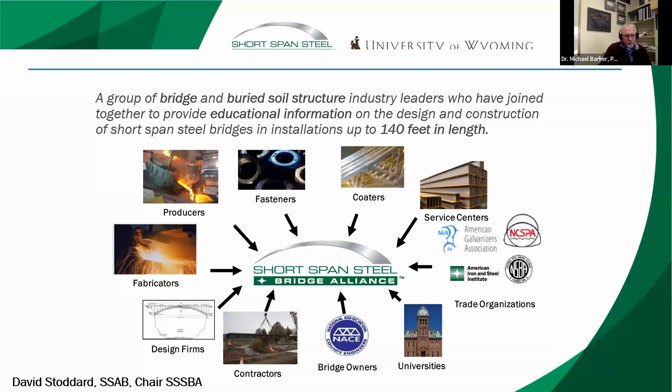So, of course, this is the Minnesota Local Technical Assistance Program January 15th webinar from the Short Span Steel Bridge Alliance. So who are the Short Span Steel Bridge Alliance? We're a group of bridge and buried soil structure industry leaders who have joined together to provide educational information on the design and construction of short span steel bridges.

Our chairman is David Stoddard, one of our steel manufacturers, SSAB.

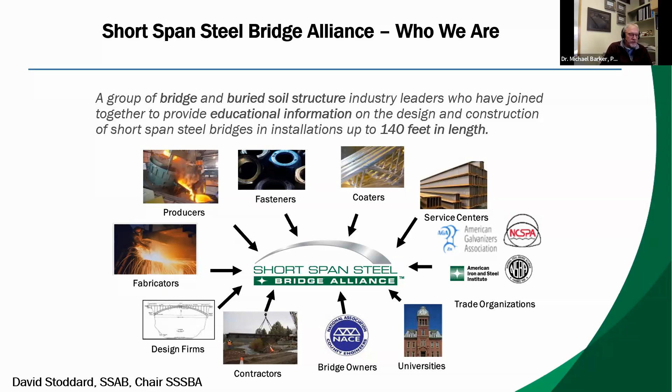Why we are: we started in 2007 with a couple major objectives. One was to remove design obstacles for short span steel bridges, and we're going to talk about those today. Overcome the preconception that concrete is always less expensive in the short span - we're going to talk about that today. And prefabricated steel bridge systems and accelerated bridge construction - we're going to look at some case studies.

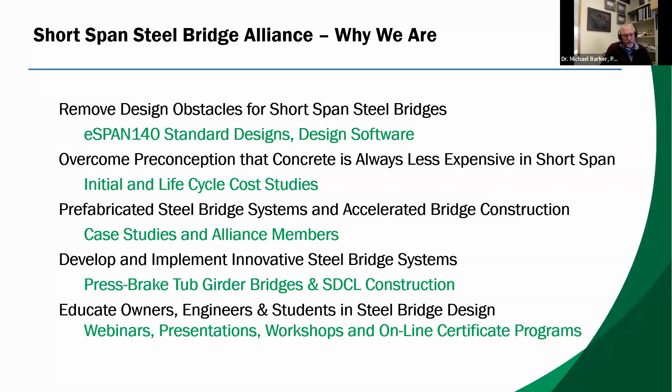And then our innovative steel bridge systems that have been developed through the SSSBA or other mechanisms, and we will talk about that today. And of course, today is an example of it, but we are out there to educate owners and engineers and students in steel bridge design.

So as the director of education, I kind of categorize my education programming as the 5 C's: cost, convenience, construction, county built, and carbon. Now, the ones that are circled here in red, we're going to talk about with some examples and that kind of thing.

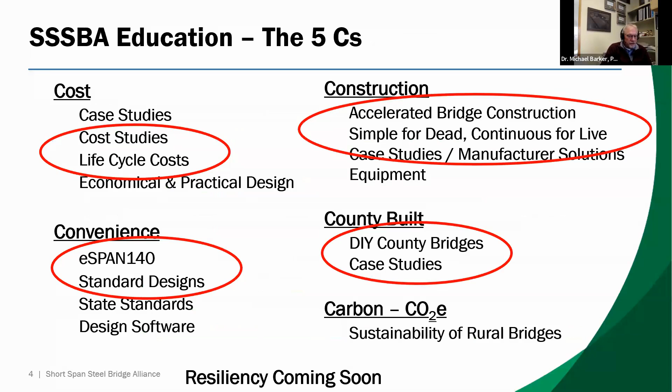And coming soon is resiliency, but I don't have that in the 5 Cs because I can't figure out yet how to do an R with 5 Cs. But that's coming soon.

So what we're going to talk about today is initial costs of steel and concrete bridges, dealing with that preconception, life cycle costs, because responsible owners should consider life cycle costs and long-term performance. That, a design tool, eSpan140, which will give you a steel bridge design in a matter of just a couple minutes. And then, of course, Bridge Manufacturer Solutions, where our Alliance members will build you a bridge, design a bridge, and deliver it to you.

Then we've done quite a bit of work with local crews building county bridges, and so we're going to talk about that a little bit. And then an innovative system, simple for dead, continuous for live, steel bridge construction, which is an innovative design thing. Then we're going to end up talking about how you can find out more information, or what our resources are, or additional training. And we only have time to quickly address all these topics today.

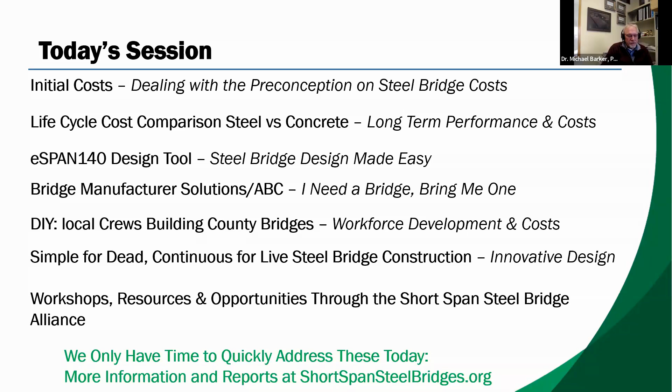So let's start. Initial cost, steel versus concrete. So when we started this back in the late 2000s, there was across the country a preconception that concrete is less expensive than steel bridges for typical bridges, simple span bridges. To the point where in many states or many counties, many times steel was not even considered. They just went directly to a concrete bridge.

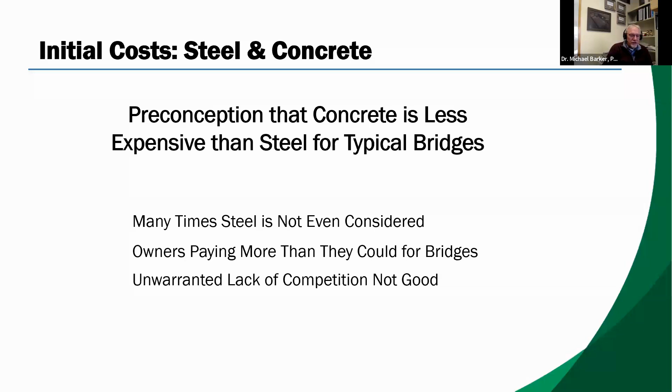And what we found, and what the National Steel Bridge Alliance found, is that the owners are paying more for those concrete bridges when there's no competition than if there is competition. And that unwarranted lack of competition is not good for anybody, the public or the owner. And so the Alliance has done, I can't tell you how many studies on first costs, and I'm not going to go through them individually just because of time, but I will show you where we're going to be giving this presentation here in February, a little bit later in today's talk.

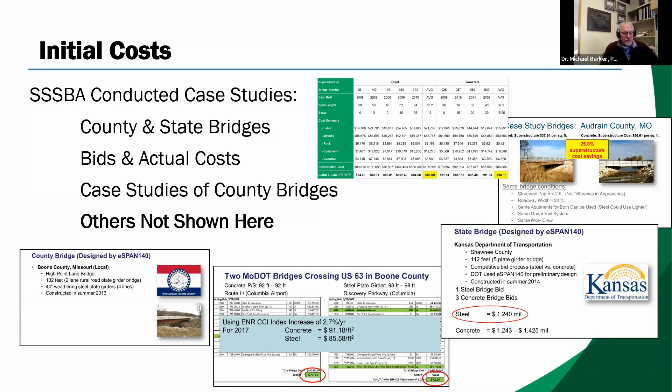But we've conducted case studies where we look at county bridges and state bridges, and we look at actual costs and bids and that type of thing. And so this is just a kind of a smattering picture of some of the case studies we've done to show that, yes, that preconception that concrete is always less expensive than steel bridges is a misconception, that steel and concrete bridges are competitive. So I'm not sitting here saying steel is going to beat concrete. What I'm saying is, hey, we should consider both steel and concrete so that we get the best product for the best price. And you can visit these studies or look at all these studies on that website, shortspansteelbridges.org.

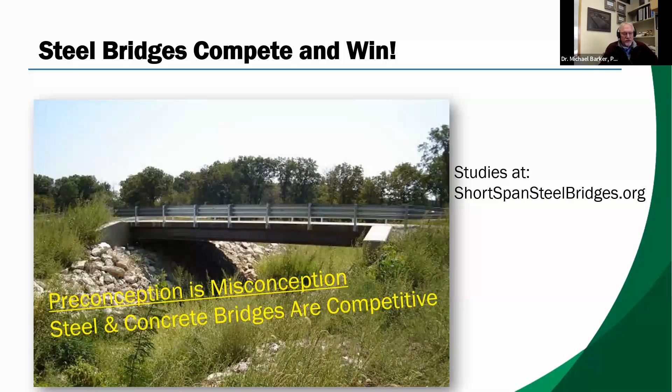But what about life cycle costs? Like I said earlier, responsible owners are starting to look at life cycle costs and life cycle performance of bridges. And as owners replace those bridges, the question of life cycle or life service and life cycle costs comes up. It's one of the most common questions I get when I go out and talk to counties and states. And the bridge industry, it says, does not have a good answer. And I crossed that out and said, did not have a good answer.

In fact, the concrete people always said, oh no, concrete bridges have better life cycle costs. And the steel bridge people always said, the steel bridges all have better life cycle costs. And they would give their information, and that anecdotal information was not very convincing.

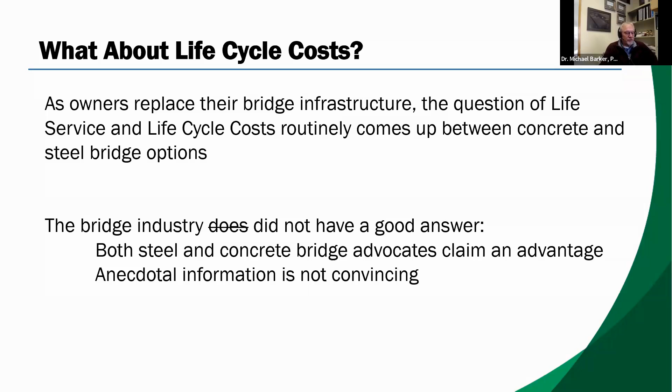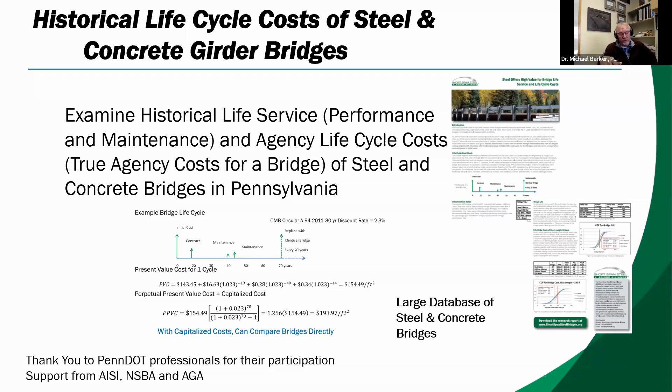And so the Alliance did a study, back in 2015 I believe, where we looked at the historical life service, or the performance and maintenance, and agency life costs, or life cycle costs, or the true agency costs for a bridge of steel and concrete bridges in Pennsylvania. And we looked at a very large database, like 1,700 bridges. And it looked at the historical life service because that's what actually happened. And the study, the initial year for the study was 1960, when precast concrete became very popular and quality steel detailing became popular. So it looked at more or less modern bridges.

And the conclusions from all this.

Now, this is a big study, and I'll show you where we're going to be presenting this in February. Typical concrete and steel bridges—the boxes, I-girders, rolled beams, and plate girder type bridges—are competitive on initial costs, which we already knew, future costs, life cycle costs, and even bridge life. The conclusion of this study is that owners should consider both steel and concrete bridge alternatives for individual bridge projects. When we looked at all of that data, all the types of bridges are similar, with none way out of balance, meaning none have high life cycle costs compared to the others, or low.

You can find this report on the shortspansteelbridges.org website. We also did a study on galvanizing, which is a long-term steel protection system. The industry was interested in what kind of effects galvanizing has on life cycle costs. You can find that report there also.

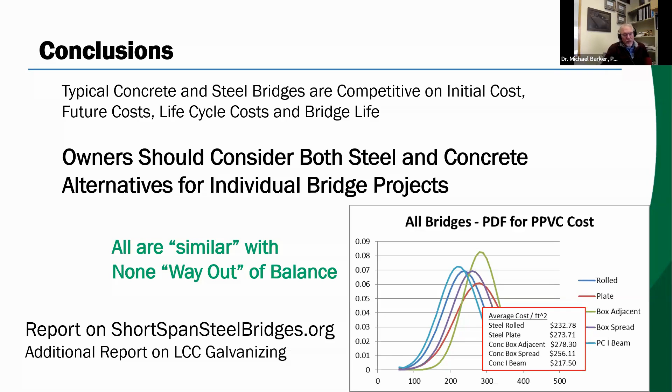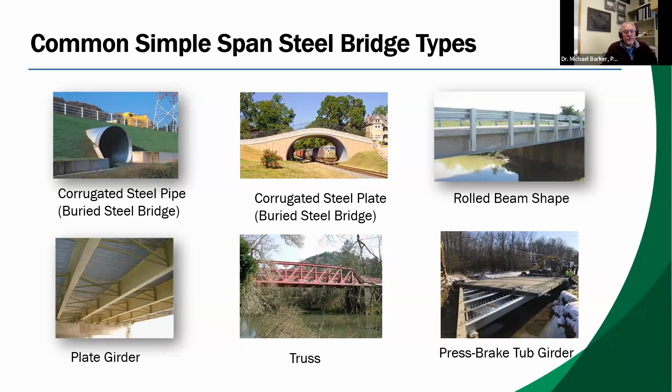Okay, so we've taken care of costs. The Alliance deals with these types of bridges: corrugated steel pipe, or what we call culverts, is a buried steel bridge, and that's certainly one our group associates with. Then you've got corrugated steel plate, which is kind of an arch bridge, with corrugated arches going across to create the bridge. And then, of course, the rolled beam-shaped bridges and the plate girder bridges. Our manufacturers certainly have their truss bridges. And as part of the Alliance and industry, we developed the press brake tub girder. We're going to look at an example of that, because that's one you might not have heard of before.

But if we think about the bread and butter bridges, the traditional fabricated steel bridge where a county or a state wants to put in this 80-foot bridge.

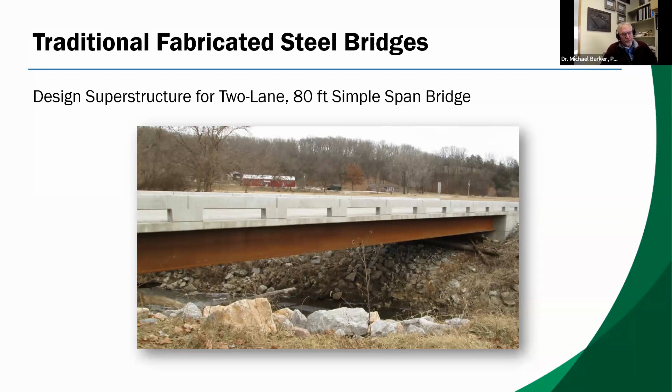Well, in the beginning, that owner or engineer has to make some decisions on the service performance of that bridge. For the hydraulic opening and all that kind of stuff, we need this 80-foot simple span composite bridge, built out of steel girders. We're going to have two 12-foot travel lanes with a certain average daily traffic and width, and we're going to use jersey barriers because we want to protect the water underneath. Okay, that's the service part of the bridge. That's what you see when you're driving over it.

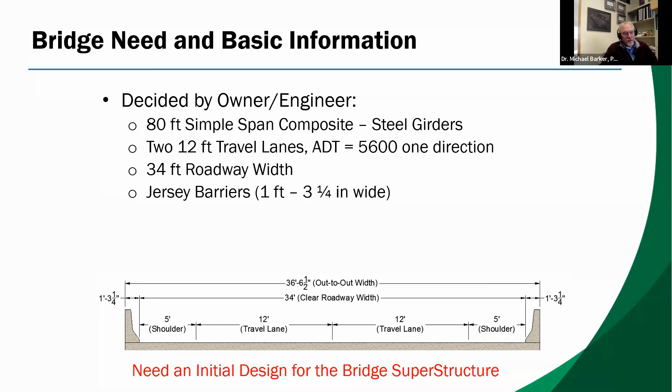Now we need an initial design for the bridge superstructure—what kind of girders are we going to put underneath that meets all the AASHTO requirements and is economical and performs well? The Alliance developed eSpan 140, a free design tool you can find on shortspansteelbridges.org, which has created a very large database of different designs that meet all the AASHTO criteria for span lengths from 20 to 140 feet, for different girder spacings.

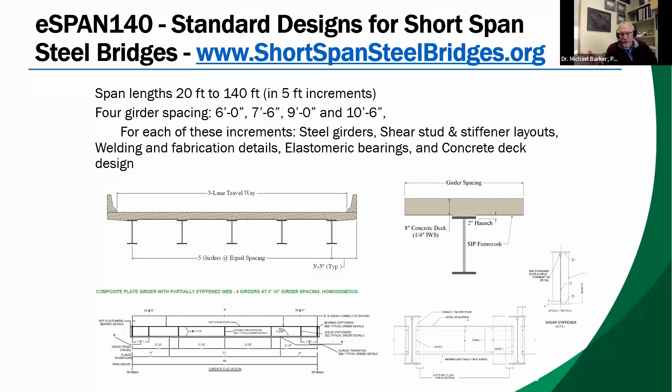And for each one of those, eSpan will give you the steel girder design, the shear stud design, stiffener layouts, welding, fabrication details, even the bearings and the concrete deck design. So if we need to design this 80-foot span bridge, we go into eSpan, and it's actually going to give us four or five solutions.

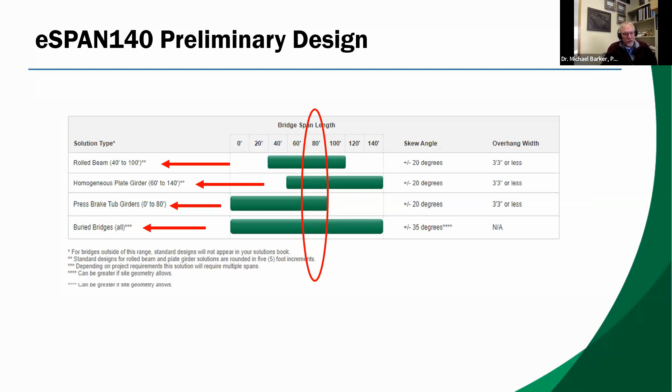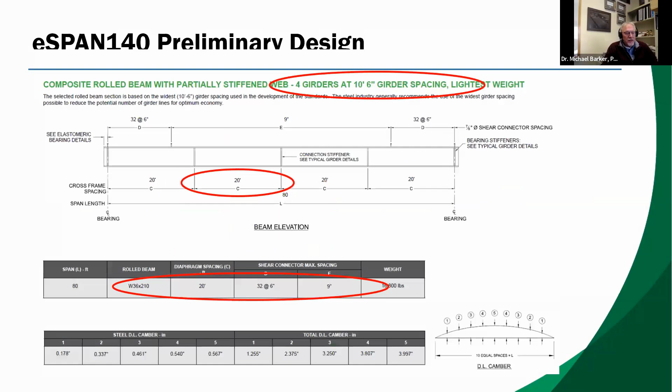Yes, it's going to give us a rolled beam solution and a plate girder solution, but also one of our manufacturers' solutions, like the press brake tub girder or buried bridges that we'll look at a little bit later. For an 80-foot span, it's going to give us a rolled beam and a plate girder. It's really simple to run—you put in how long the bridge is, how many lanes you have, what your roadway width is, and what your barriers are. It's going to give you some designs that meet all the AASHTO requirements.

This is an example of the lightest weight rolled shape design. It also does limited depth rolled shapes. It says, let's put those girders at 10 foot 6 inches, make those W36 by 210s, and have some diaphragms every 20 feet. Boom—just in a matter of minutes, you know what it's going to take.

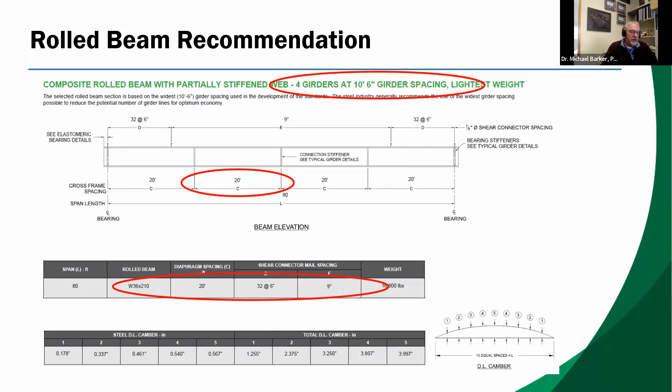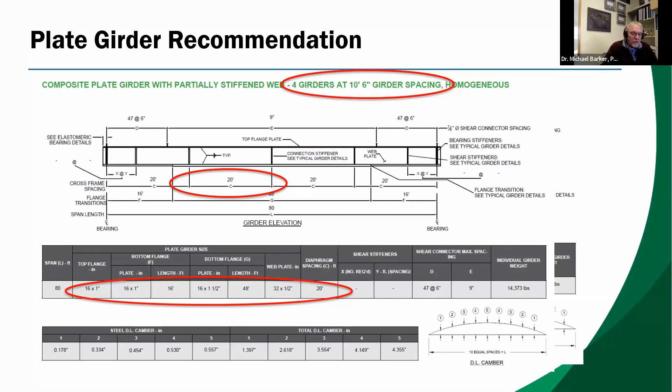For the plate girder, with plate girders we can optimize a little bit better. We can get rid of some of the weight by transitioning the flanges and making the web thinner. Here's a plate girder, a homogeneous plate girder made out of 50 KSI, where we're going to have a top plate and a bottom plate. We're going to transition that bottom plate, have a web, and have those diaphragm spacings at 20 feet. Now, in just a matter of minutes, we have a design that we can put on the table and compare to those concrete options, and then let the market decide.

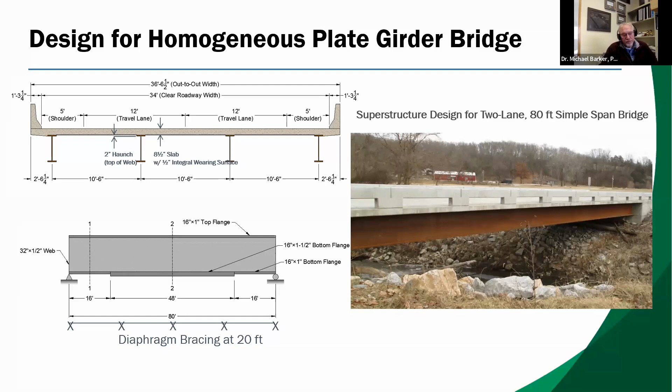Now we have a superstructure designed for that 2-lane, 80-foot simple span bridge in just a matter of a couple minutes. Now, I did say that eSpan will also talk about manufacturer solutions.

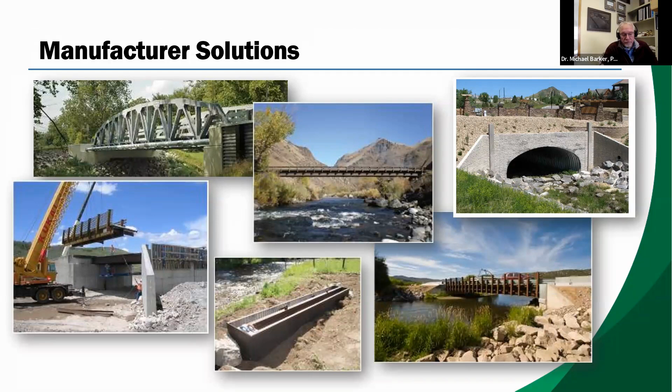We have prefabricated bridge manufacturers that are part of the alliance that do truss bridges and modular bridges and ABC abutments and the whole range of things, whether they're buried or rolled or plate or truss. We're going to look at three different types of bridges. These are prefabricated, which kind of means they can be accelerated bridge construction bridges, and we're just going to look at a showcase of three different types of steel bridges.

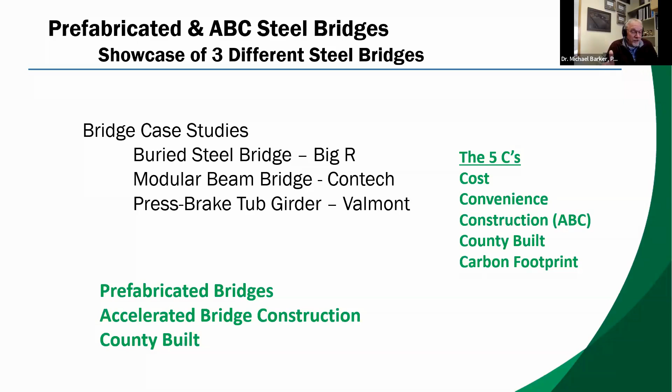The first one we're going to look at is a buried steel bridge, one of those arch bridges, from Big R. A modular beam bridge, the most common type of prefabricated bridge, from Contech. And then one of those press brake tub girder bridges that you might not have seen before, from Valmont. These prefabricated bridge manufacturing firms and traditional fabricators fabricate and deliver many styles of steel bridges, and these case studies are just a sample of the varieties they produce.

For this first case study, this corrugated steel plate buried steel bridge was built in St. Johnsbury, Vermont. The bridge was fabricated and designed by Big R Bridge in Greeley, Colorado, and built by J.P. Sicard. The bridge is located on a steep, narrow site on a curve with residents living right nearby, and there's poor soil on the site, so the designer needed a system that could accommodate significant differential settlement. Limiting the days the trail could be closed was a priority, since this is a rails-to-trails type project, and constructing the bridge before the peak summer and fall seasons was a priority of the owner. The contractor had a maximum 50-day closure of the roadway.

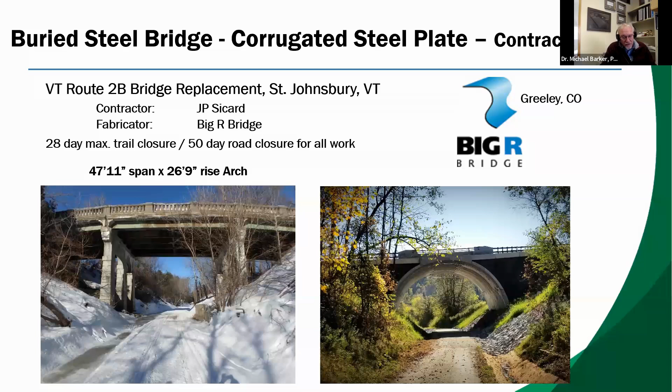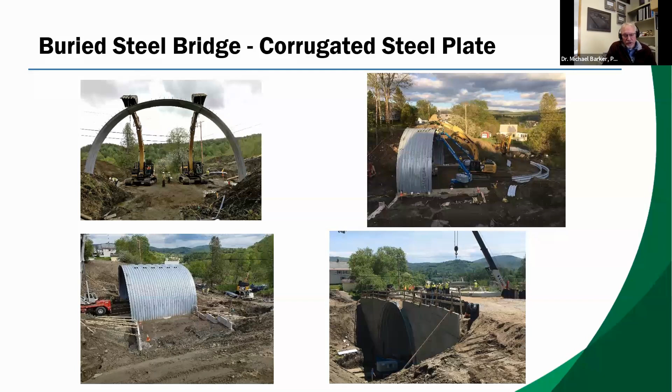They actually earned a monetary incentive when it was reopened after only 45 days. This ABC project used precast concrete foundation blocks and precast wall panels to significantly shorten the construction time with no concrete curing times. The corrugated structural plate is stacked and shipped to the site and bolted together to make the arches. Then light equipment can be used to lift the arches and connect them together across the width for stabilization. Then the bridge arch is covered with soil and the roadway is built.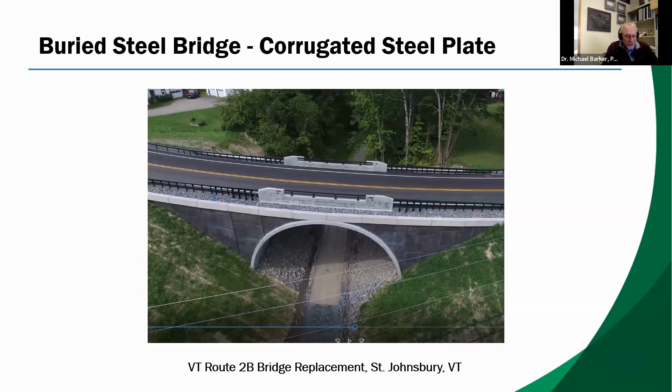A buried steel bridge is lighter weight, flexible, and able to handle anticipated settlement. With the lightweight structure, the Vermont bridge was able to use those precast footings. Because of the arch, shorter spans are required to achieve vertical clearance requirements, and there is a continuous road surface with no bridge deck or joints to maintain. So that was our first example, a buried steel arch bridge.

They also come in lots of different forms. For instance, that was a significantly large bridge. Here's a small bridge over a small opening in Alaska, where the tribal workforce built this bridge with their local equipment. The environmental people really like these types of bridges because, in comparison to a culvert, they have a natural stream bed underneath for fish passage and environmental concerns. So here's another example, a smaller one, where these buried steel bridges can be used and even built by local workforces.

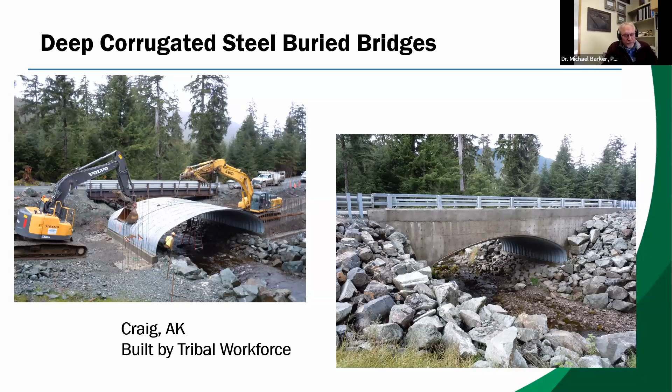The prefabricated modular beam is probably the most common prefabricated bridge out there. This one is a county crew-built bridge, built in Whitman County, Washington, a replacement project built by county forces for an originally built 1952 wood structure. The replacement bridge was planned to have a longer span in order to improve the hydraulic opening under the bridge, which is very common, and this also made it easier to build the new foundations behind the existing wood foundations. One of the goals of the replacement was to open the channel wider and raise the bottom chord of the bridge above the 100-year recurrence flood.

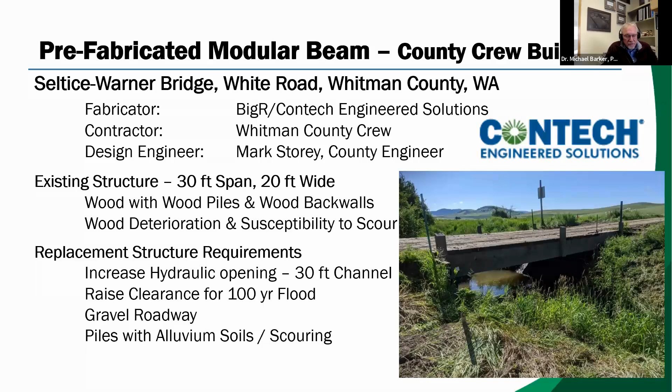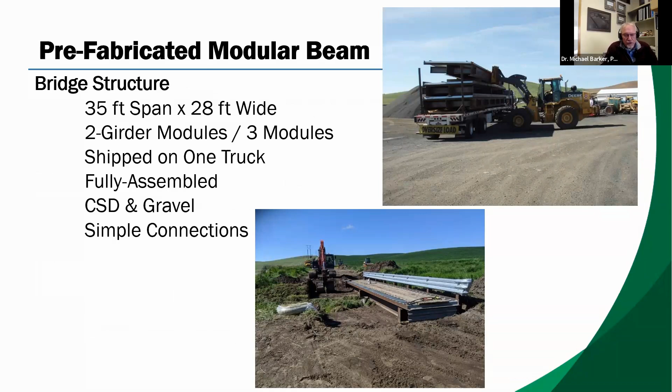This is again a gravel surface bridge. The successful bidder with the lowest cost was a modular rolled beam steel structure supplied by Contech. The final dimensions for the new superstructure were 35 feet long and 28 feet wide. The modular rolled beam steel bridge consisted of 3 modules shipped to the site on 1 truck, and each module had 2 weathering steel rolled beam girders fully assembled with a corrugated steel deck for the gravel riding surface.

Now, these are just a few of the pictures of the 2 girder superstructure modules being erected. The modules are shipped to the site, assembled with corrugated steel decks, side dams, simple cross-frame diaphragms, and guardrail stubs. Front end loader and excavators pick up the modules and place them on the abutments with the bearing assemblies. The modules are connected together using simple connection details. The guardrail stubs, guardrails, and back wall are installed, and the gravel roadway surface installed.

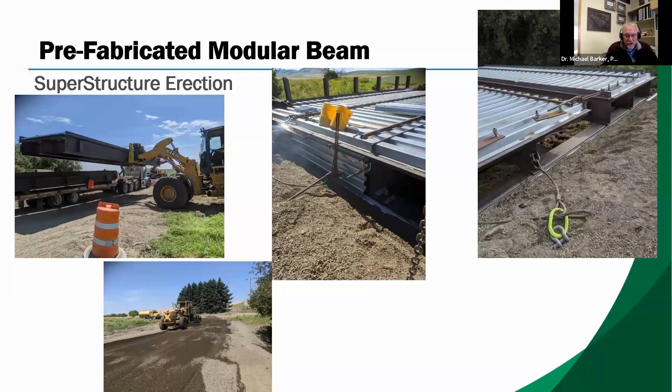And so here's where selecting a bridge structure that can easily be handled by 1 or 2 excavators significantly reduces the overall project costs and shortens the construction time. Modular steel bridges in particular fit this product category as they are relatively lightweight, are easy to handle, and fit well due to the quality of shop fabrication. And with no concrete curing time, the bridge is ready for traffic.

Now, this Seltice-Warner Bridge project was started on June 15th and completed and opened to traffic on July 15th in 2020. Whitman County sought competitive quotes for the manufacture and delivery of both steel and concrete superstructures for this site. The cost for the concrete alternative was $82,000 and the cost for the modular beam was $59,000.

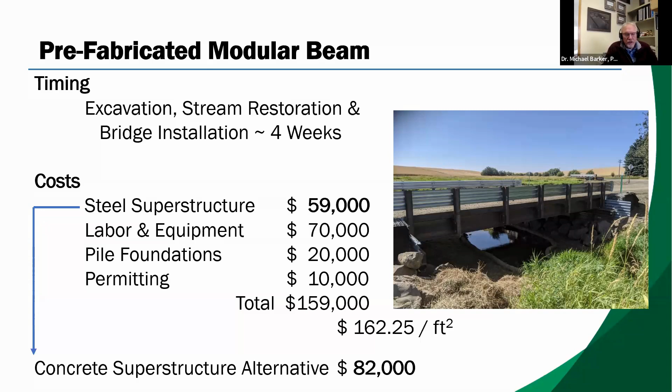And so I just put this in here to show that one example where, yes, steel is competitive and steel should be considered. And then, of course, with the cost and labor and equipment, the pile foundation and permitting, the total bridge cost was $159,000 or $162 per square foot. County crew built bridge.

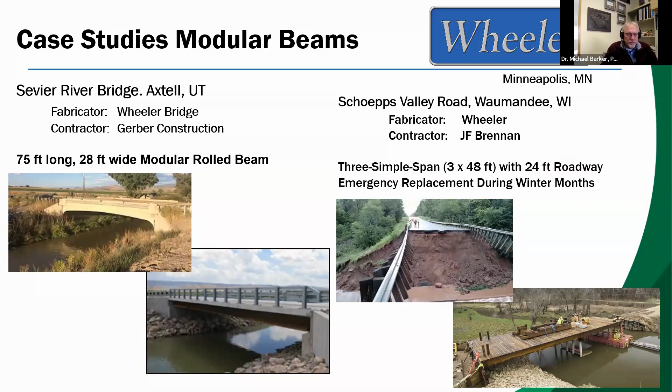came up with a press brake formed steel tub girder where you take a standard width plate, put it in a brake and bend it into a tub, put some shear studs on it, put some concrete on it. So you have these modules and then you go out and you just put them in place. So that reduced fabrication costs, because yes, tub girders have been around a long time, but you take a flange and a web and you weld them together.

There's no welding here, which removes fatigue issues, which reduces costs, and they can be mass produced. And it reduces stiffeners and cross frames. And these can be accelerated bridges. In fact, with a precast deck, you can install these bridges in 1 or 2 days. They are modular, they're simple to fabricate and install.

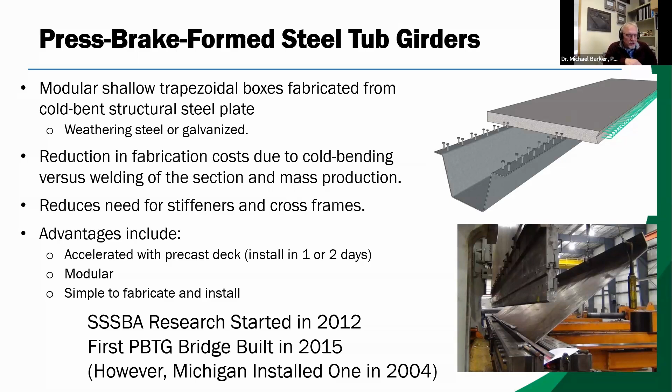Now, our research on that started in about 2012, but there's a guy in Michigan that actually put one of these in place in 2004. Now, that same guy who built that in 2004, he went to a company called Valmont and said, hey, how about we develop a division here to produce these press brake tub girders? They call them U-beams, but it's still a press brake tub girder. And this is not a proprietary design, but Valmont decided to take this and run with it. And they've done a really good job, as I'll show you on the next slide.

And so the bridge I'm going to show you is here from Barron County, Wisconsin, where there was an existing timber slab structure, 96 foot long. It was old and they needed a new structure. And Barron County went with a two-span, 104-foot length. So of course they increased the hydraulic opening a little bit and clearance a little bit, and they used these press brake tub girder bridges.

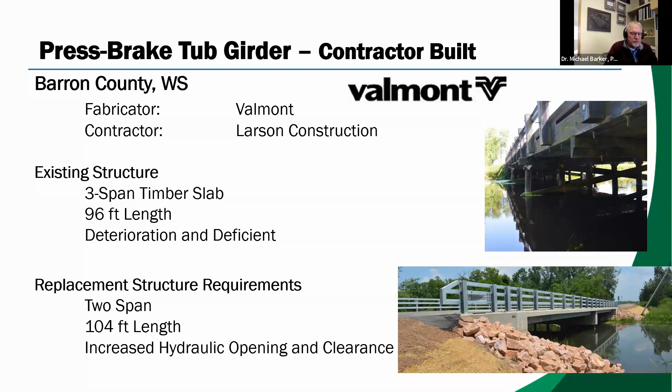And so at Valmont, they developed this whole system where they bring in these standard width plates. They came up with efficient ways of bending them. Then they have a machine they developed for cambering them. Again, another machine to put on those studs. And then, of course, Valmont likes galvanizing, which is really a good steel protection system. And they have all that stuff right there because they're poles.

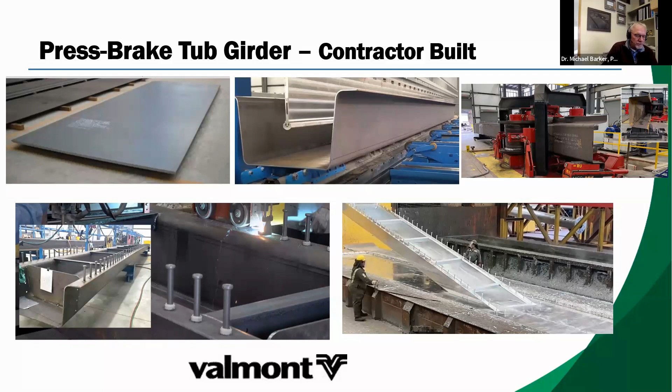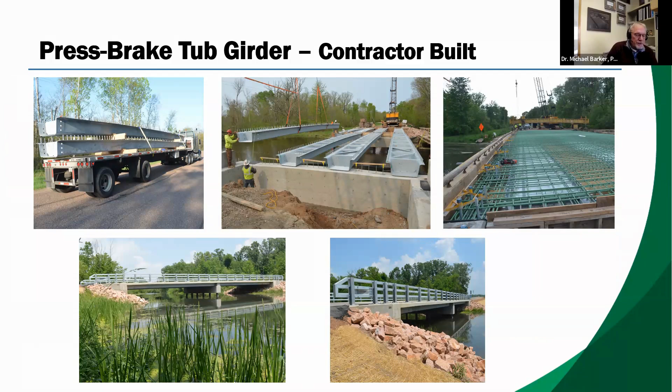Now, you also can precast these things. One is precast the decks right on those tubs, and Valmont will do this for you, or you can do it on your own with your own fabricator, where now you send out pre-decked modules and you put in a longitudinal closure pour with like a UHPC or something like that.

Or the bottom slide here shows where those tubs go out as individual tubs and they have the studs on them, and you put precast deck panels on them with grout holes and all that kind of stuff. And you do the closure pours in the grouted shear pockets. And so if you have questions about these, you can contact the Alliance or you can go to Valmont directly.

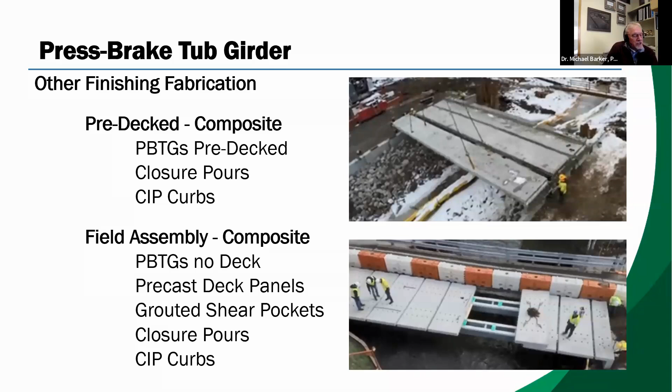Okay, so we looked at a couple bridges that were contractor built, and we looked at one bridge that was county built. And so the Alliance started putting together some educational resources for counties for them to consider whether they should be building their own bridges. Because there are a lot of bridges in the counties that need replacement. And we need cost-effective and sustainable solutions.

And one option is to use county crews for bridge installations. For instance, this slide here says Mark Storey up in Whitman County saved over $30,000 by using local crews to install a prefabricated steel bridge. It also develops his workforce.

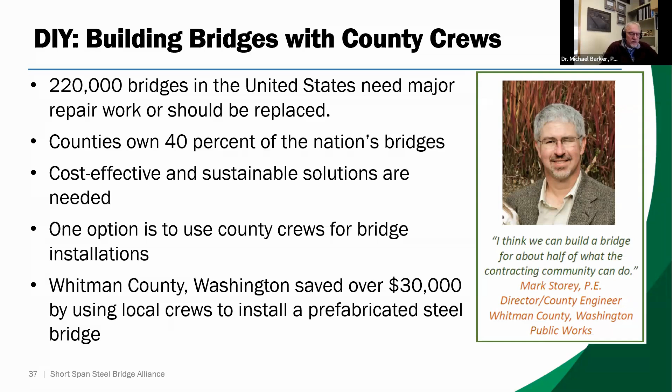So the Alliance developed a DIY county bridges education packet, where there are over 3,000 county type organizations in this country. And the purpose of the packet is to have counties consider whether they should be building their own bridges, because counties can save money and of course build more bridges, which is very, very important for those counties. It can use accelerated construction and minimize public inconvenience because they are in control of the work site, and it develops county workforce and uses county equipment.

So we came up with 6 topics. There's kind of 6 lectures in this, where it starts off with, can your county build this bridge, and then moves into planning, permits, environmental issues, geotech considerations, and then how to select a bridge type and bid for that and award that. And then foundations and substructure design and installation, because there are some easy ways that the county can do it, or you can subcontract that out and have a contractor build you one.

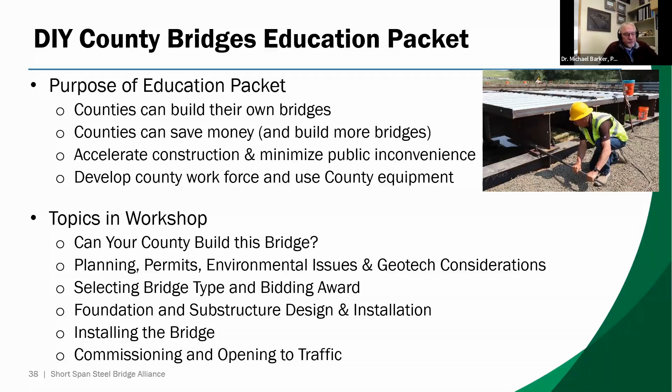And then, of course, installing the bridge. That's actually the easy part, especially if you buy one of these prefabricated bridges, and then commissioning and opening to traffic. And so we use this Belmont Bridge in Whitman County as a learn by example for how a county can build their own bridge.

And it starts off with the existing bridge being a pretty old, deteriorated wood bridge, only 20-foot long, and the new bridge being 30-foot long. So we increased that hydraulic opening, increased the clearance, 20-foot wide. And this is a True North modular steel bridge, and then installed by the county crew.

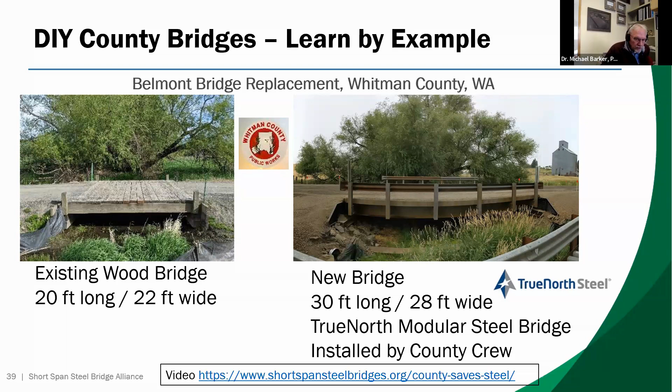Now at the bottom there, and I know that Natalie and Dan Snyder are going to post these on the websites later, take a look at that video. It's pretty cool. That's just a video that talks to the bridge engineer and the bridge foreman and the workers on how they developed the capacity to be able to do their own bridges. So that's a good video. I'm not going to show it here, but you are certainly welcome to go through with that. And True North is one of our Alliance members.

Now, we gave this talk to NACE, the National Association of County Engineers, in 2022 with just a 1 hour presentation. They weren't sure what they were getting. And I, Michael Barker, and Mark Storey, that engineer from Whitman, went and just gave a 1 hour talk on this. And it was very well received. They were really happy with it. And so they invited us back for a 2 hour session the next year for NACE.

So we know there's lots of bridges that need replaced. We know there's ways to do that. We know we have alternatives for materials and construction and all that kind of stuff. And one of the driving factors for getting this done is the new bridge infrastructure law, right? And in that, you can get good federal money for doing bridge projects on a local level or a state level with a state-local partnership.

Now, the minimum amounts are pretty big. And so even in the BIL, they talk about bridge bundling. Hey, let's get several bridge projects together that are coordinated in the design and construction to help economize, save money, and get these bridges built. And a lot of this money under the BIL and of course the BIP, the Bridge Investment Program, are targeted for tribes or local bridges or off-system bridges. And so there's money to go after, and bridge bundling becomes an important part of that.

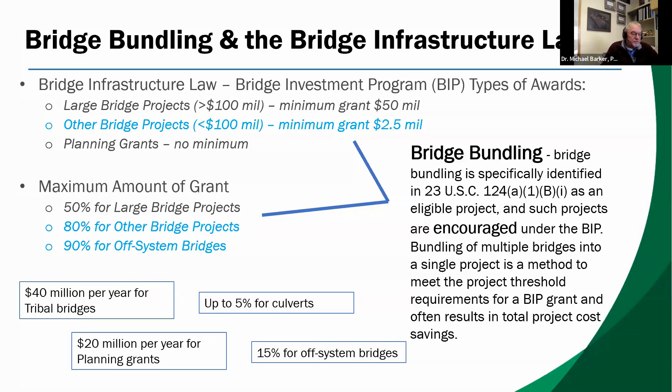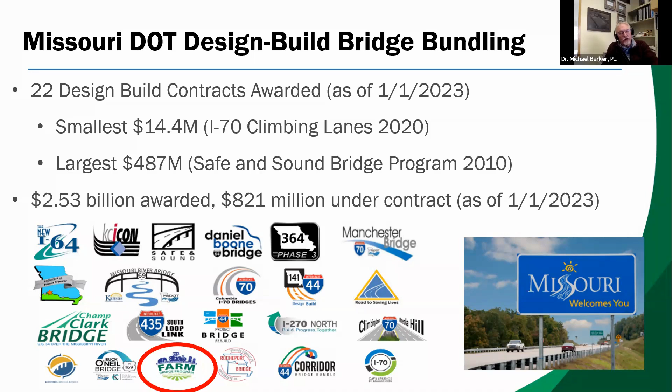Now, Missouri DOT is probably one of the leaders, if not the leader in the country, for design build bridge bundling. They've had lots of contracts, they've done lots of projects. And one of those projects down here at the bottom, a little bit left, circled in red, is called the FARM Project. And I'm just going to talk about that a little bit because I think it's important to see how this state does their bridge bundling design build projects.

So FARM stands for Fixing Access to Rural Missouri. And what happened was MoDOT identified up to 40 bridges in northern Missouri for replacement. But they're a little unique in the way they do it. They don't say, hey, how much will it cost us to do these bridges? They say, we have acquired this much money, or we're willing to put this much money. Tell us what you're going to do with that money. And then they're looking for the best value for that fixed budget.

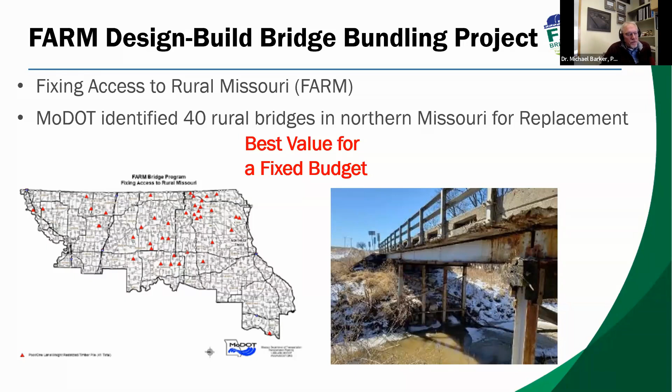And then they have a scoring system where it's not just the maximum number of structures or the maximum square footage or that type of thing. It looks at, yes, the number of structures and the size of those structures and the ADT and that kind of thing. But that's only part of it. That's 55 of 100 points. Then they look at bridge quality and longevity. So they're bringing in those other aspects, not just maximum square footage. And that's worth 30 points. And then completion and maintenance of traffic or kind of accelerated bridge construction and control of the construction site and that kind of stuff. And they rate those.

And so, of course, the number of bridges and that kind of stuff where there's a base and a bonus part of that is 55 points. And then the bridge quality and longevity, they scored by a team of 8 technical experts. And then for the construction part, the completion and maintenance of traffic was scored by a team of 6 technical experts. And again, they're looking for a best value for a fixed budget.

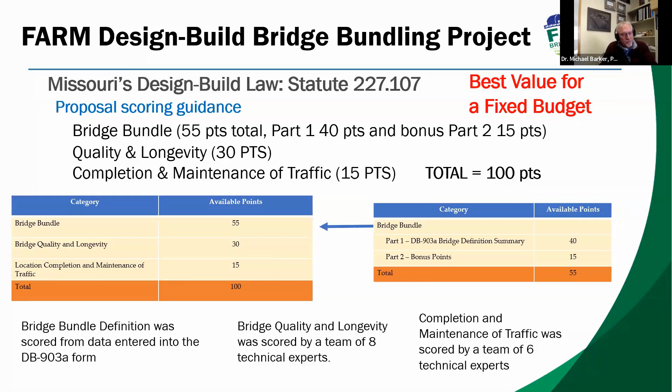So 3 teams had qualified proposals, team 1, team 2, team 3. The first 2 were primarily concrete. The third one was primarily steel. And what we see here is that the primarily steel bridges won the bid. And of course, that's why that's part of my talk today, because if it was the concrete bridges that won, we wouldn't be talking about this today. But the steel bridges won, and we want to look at why.

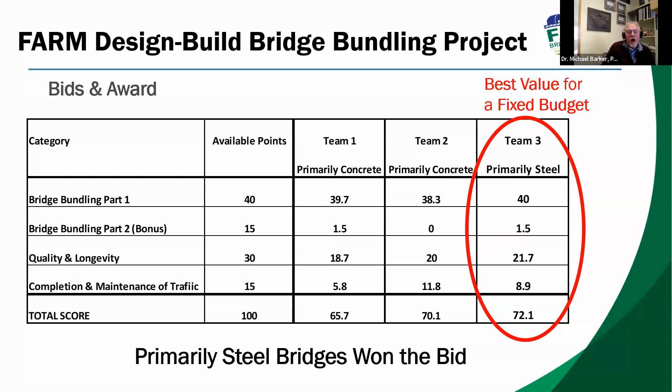So how did the steel win the bid? Now, there's lots of reasons, but there's really an important one here. There's 25 multi-span bridges in the winning package, and for the bridge bundling, the steel bridge proposer won with 40 points plus 1.5 bonus for the highest score. There were 31 bridges replaced, but they used an innovative simple for dead, continuous for live load design. And when we talk to the owner, the contractor, the designer, and the fabricator, they believe this innovative system is the reason they won this contract.

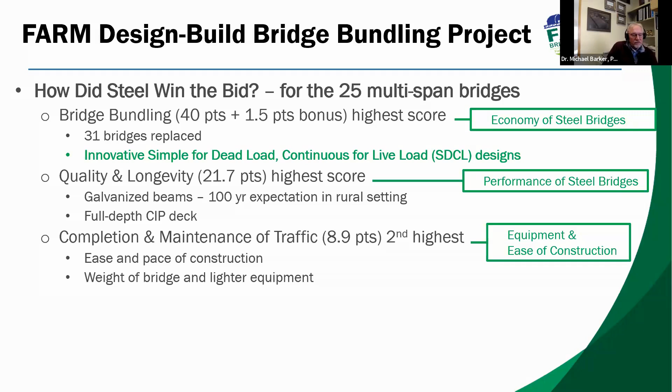For quality and longevity, they also had the highest score because they have galvanized beams, and that impressed MoDOT because of the 100-year expectation at least in these rural settings. And they used a full depth cast in place deck versus the partial deck thickness decks. For completion and maintenance, because of ease and pace of construction and the weight of bridge and lighter equipment used, they had the second highest score.

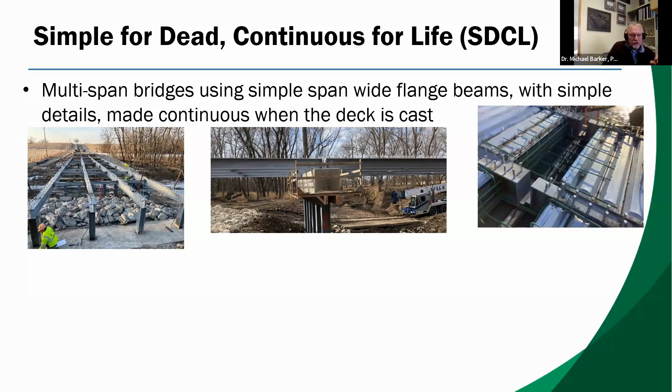So let's just look at the Simple for Dead Continuous for Live, or SDCL. So multi-span bridges using simple span wide flange beams with simple details are laid out there on their supports, and then when the deck is cast, it is made continuous. And so you form up the pier region to make that continuous connection of the simple span steel beams. And you have a compression block at the bottom, and you use the deck for the tension side.

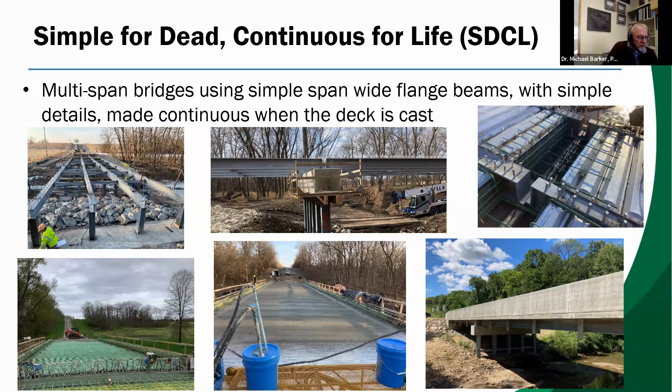Then, just like any other bridge, you put on your rebar cages and you cast your concrete, and you put on your guardrails or your rails, and you got yourself a bridge. So what are the advantages for the Simple for Dead Continuous for Live? Well, certainly ease of construction. Slinging around a bunch of simple span steel girder bridges is a lot easier than long continuous spans, because those are going to have field splices that you have to put together, and field splices can be expensive. And then because there's a set of simple span bridges, you can have flexible and economical span ratios, and you can customize the beams to the spans.

But here's another big one. Because of the simple details in the fabrication shop, it makes it more competitive, because the fabrication shop only needs to be simple bridge certified instead of intermediate or advanced bridge. If it had splices and other more complicated details, they would have to be certified at a higher level than for these simple bridges.

And then you look at some other benefits of this, the beam weights. A typical steel beam was an 18 by 158. That's only 9,500 pounds, where the concrete precast beam type 3 is 24,000 pounds. Much less weight, lighter equipment needed. And then, of course, depth is always important because of abutment work and approach work. And so you have shallower depth. Again, here we have an 18-inch depth, or almost 20 with the W18, whereas a concrete bridge is almost 40.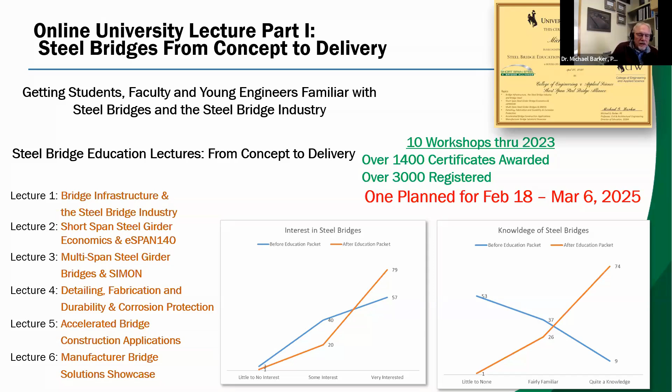Now we have a new one coming up this year. The first offering is going to be in fall. This is a design education packet where we're going to go through the design of an 80-foot simple span plate girder bridge. You can see the topics. It's 6 lectures, probably 2 a week or maybe only 1 a week, we don't know quite yet. But we're going to get into how to get a trial design, what it takes to design that bridge, and then how to detail that bridge.

It's going to be based on the National Steel Bridge Alliance's recently released Navigating Routine Steel Bridge Design. Because if you know the AASHTO specifications, they are quite complicated, and for a simple span bridge, it should be simple. Our target audience for this is university students and young professionals.

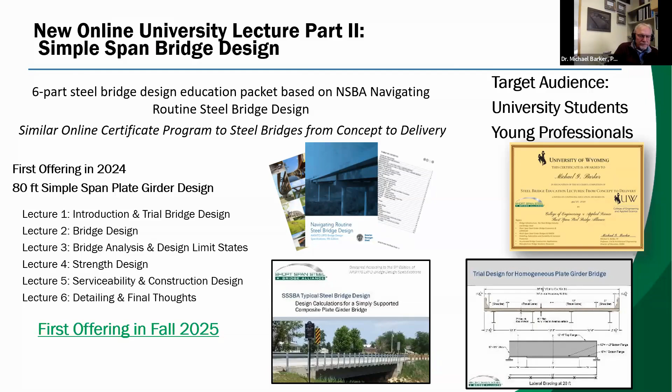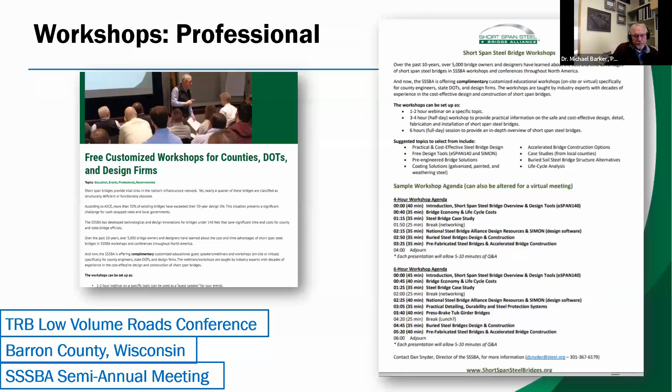We're starting something new this year. We are coordinating with the American Galvanizers Association for a quarterly Building Better Bridges webinar series. This is brand new, we just settled on everything about a week ago, and the first one is February 19th. Registration is already open, and that one's going to be on steel versus concrete life cycle performance and costs, where we'll get into what I showed you earlier and why it's validated, and why we really do need to consider both steel and concrete.

In April, September, and December, that's kind of the quarterly idea, we're going to look at some other things. In April, buried steel structures. In September, we're going to look at eSPAN140 and some newer design tools where you can design a steel bridge in just a matter of a minute or two. And then on December 10th, we're going to do a more full presentation on Simple for Dead, Continuous for Live designs for optimal performance.

And these are free. You sign up, you get PDHs, go to the websites, either the AGA website or ours, and you can find those.

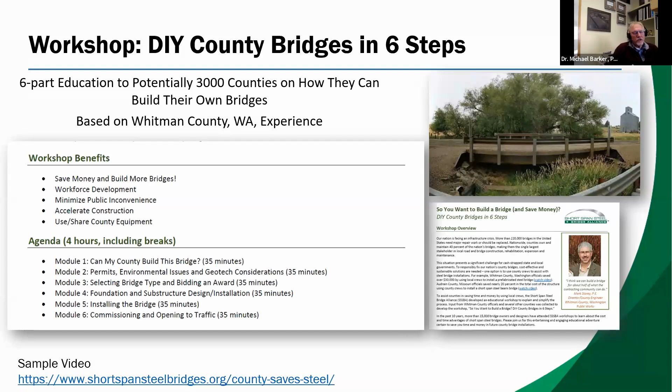And then, of course, that DIY county bridges in 6 steps. If you've got a county where you want to consider, hey, should we build up our workforce, use our own equipment, maybe buy one of these prefab bridges, maybe piece together one from a traditional fabricator, let's build our own bridges. If you're interested, you should contact us, because we've got lots of county engineers that are part of the alliance that do their own bridges, and they would love to come talk to you about how you can build your own bridges. Instead of building 4 bridges a year, or maybe even only 2, you can double it, or at least increase it by a third.